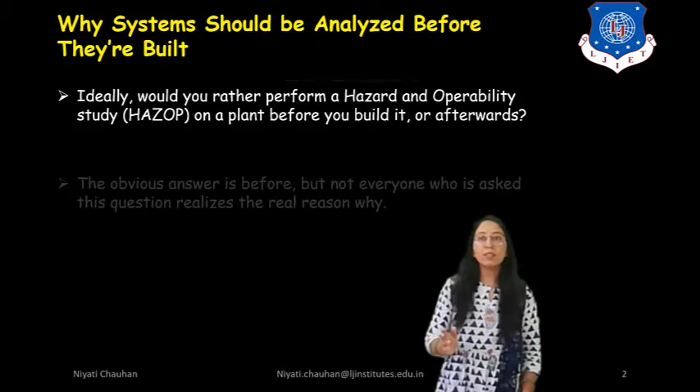Let's start today's session. In today's session, we will discuss why systems should be analyzed before they are built. Ideally, would you rather perform a hazard and operability study on a plant before you build it or afterwards? So here we are discussing hazard and operability study, when we are performing and analyzing our system. The obvious answer is before, but not everyone who is asked this question realizes the real reason why these systems should be analyzed before they are built.

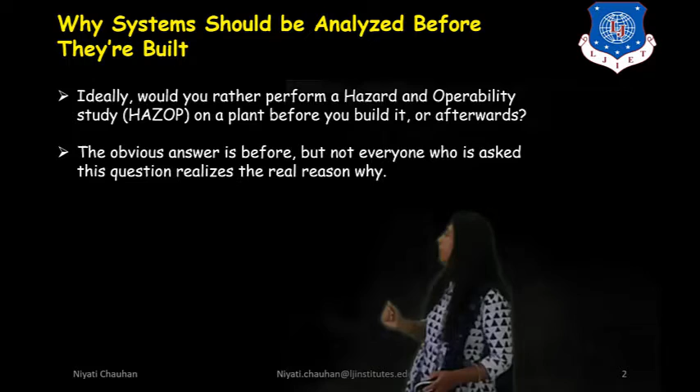It's cheaper to redesign the plant on paper. The alternative would be to rebuild the plant after the fact. The same applies to studying safety systems.

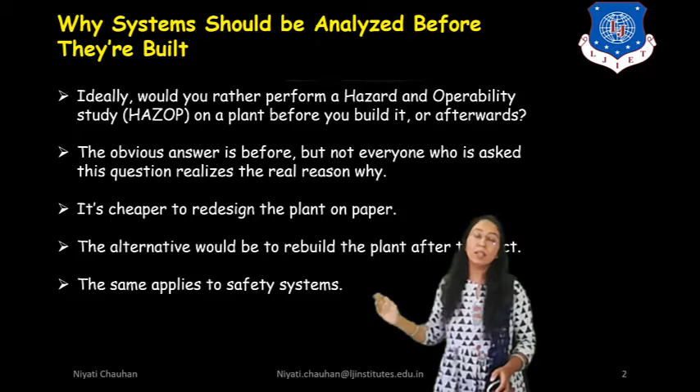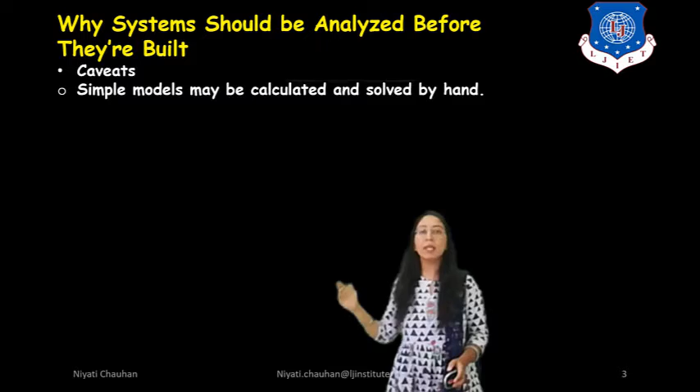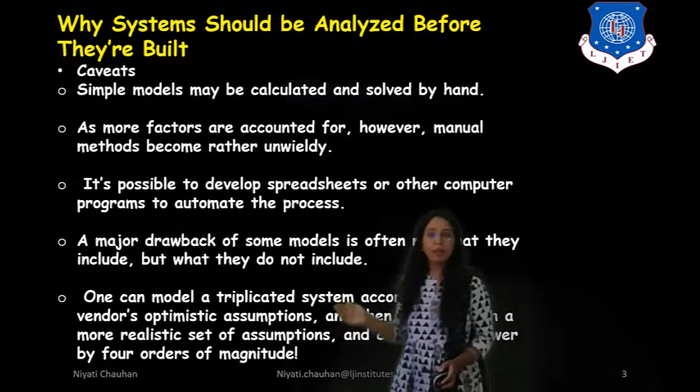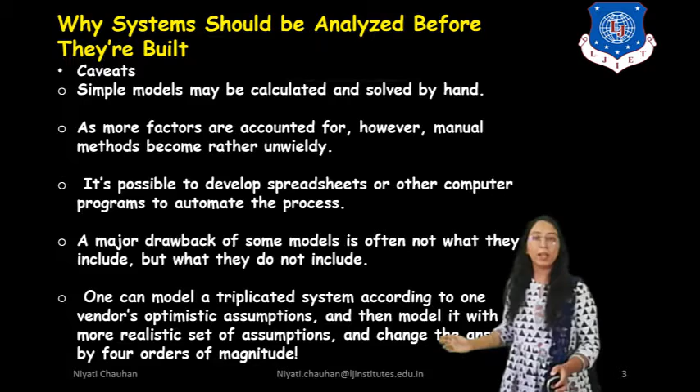Next is caveats. Simple models may be calculated and solved by hand. As more factors are accounted for, however, manual methods become rather unwieldy. It's possible to develop spreadsheets or other computer programs to automate the process. A major drawback of some models is often not what they include, but what they do not include. One can model a triplicated system according to one vendor's optimistic assumptions, and then model it with more realistic assumptions, changing the answer by four orders of magnitude.

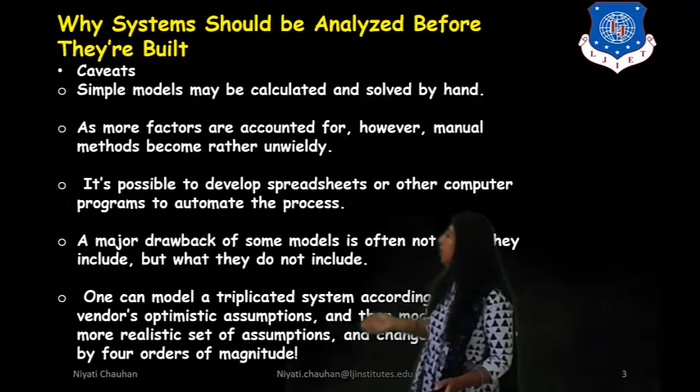So here we are discussing why systems should be analyzed before they are built. These are some of the reasons we have discussed in this session.

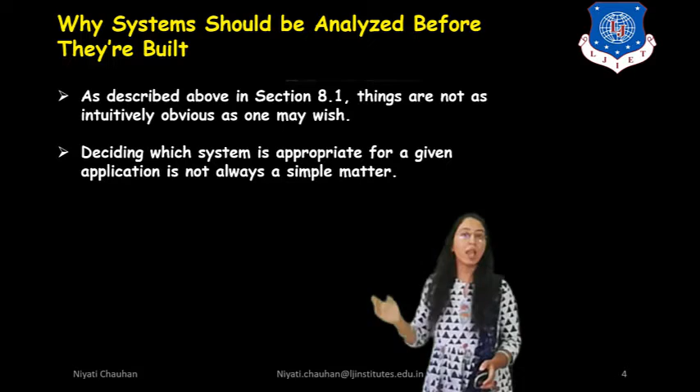As described above in section 8.1, things are not as intuitively obvious as one may wish. In the last lecture we discussed how things are not always easy to perform well. Deciding which system is appropriate for an application is not always a simple matter.

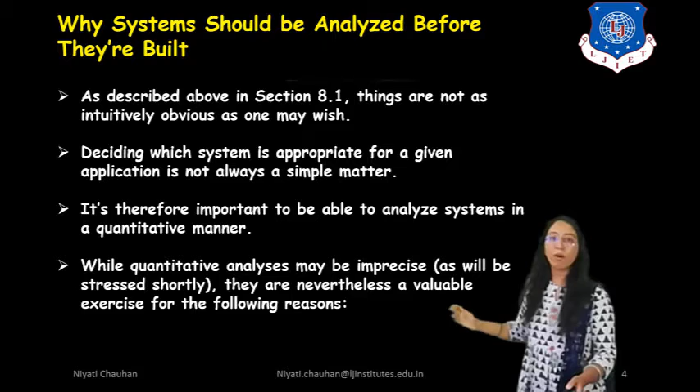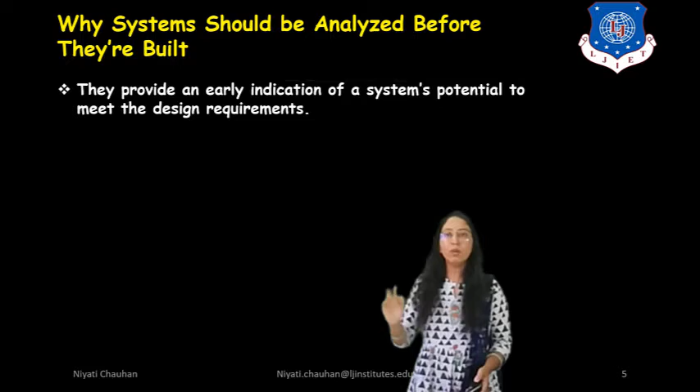It is therefore important to be able to analyze a system in a quantitative manner. While quantitative analysis may be imprecise, as will be stressed shortly, it is nevertheless a valuable exercise for the following reasons. First, they provide an early indication of a system's potential to meet the design requirements.

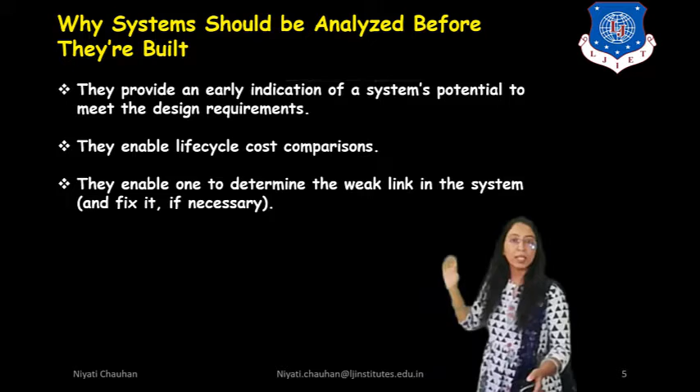Second, they enable life cycle cost comparisons. They enable one to determine the weak link in the system and fix it if necessary. They allow an apples-to-apples comparison between different offerings.

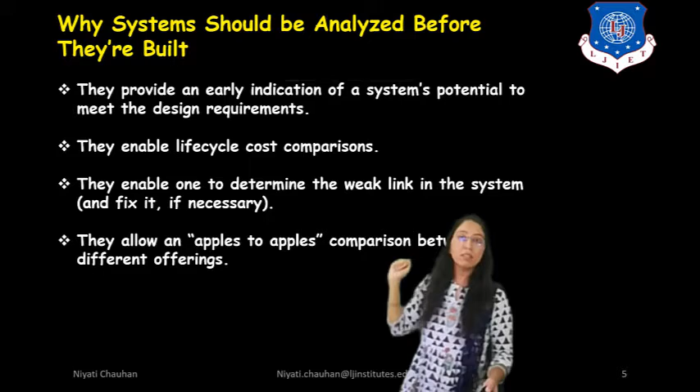So to summarize the reasons: first, for early indication; second, to enable life cycle cost comparison; third, to determine the weak link in the system; and fourth, for comparison between offerings.

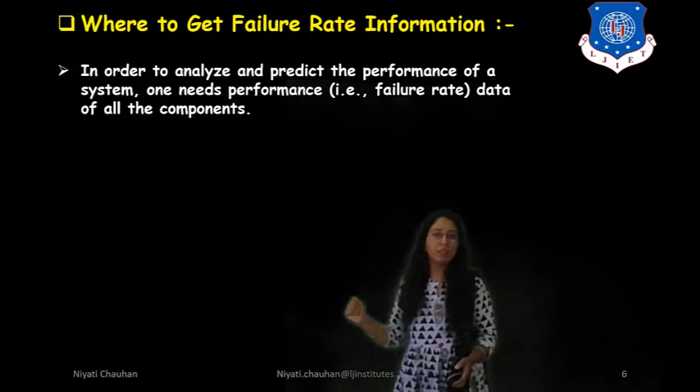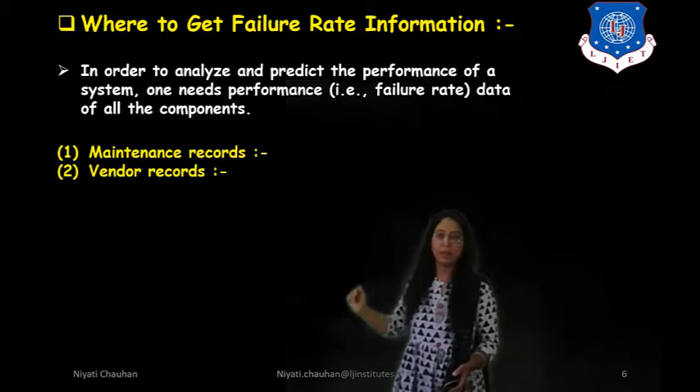Next is where to get failure rate information. In order to analyze and predict the performance of a system, one needs performance data, that is failure rate data, of all the components: first, maintenance records; second, vendor records; third, party databases; and military style calculation.

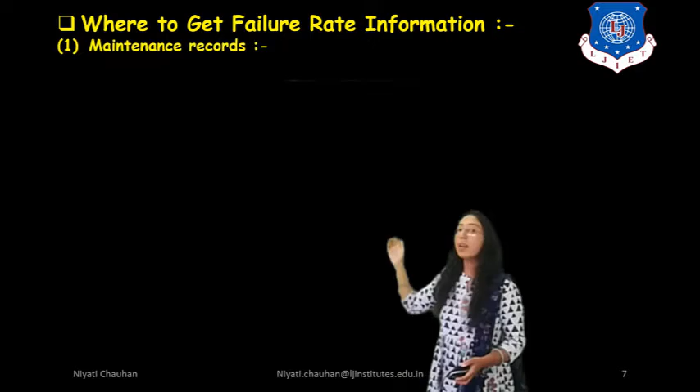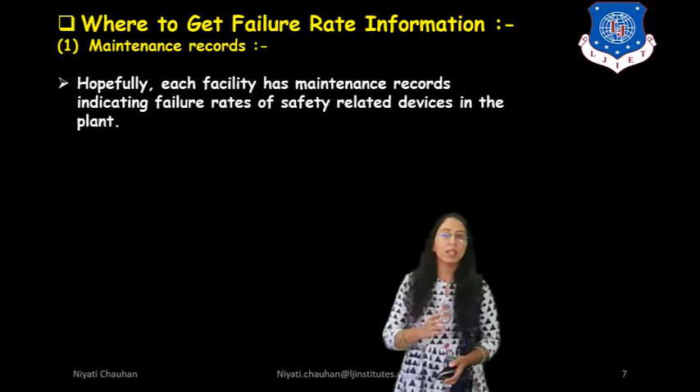First, discuss maintenance records. Hopefully, each facility has maintenance records indicating failure rate of safety related devices in the plant. The process safety management regulation, the standard studied in chapter 1, is 29 CFR 1910.119, appendix C, part 9, which states that users should be keeping this sort of data.

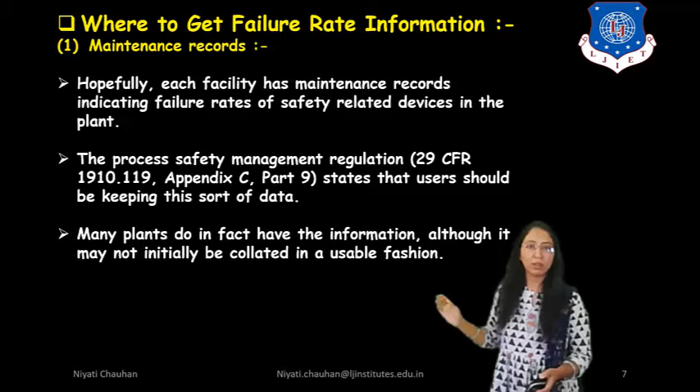Many plants do in fact have this information, although it may not initially be in a usable format. Plant maintenance records are the best potential source of data. They are most representative of the application, environment, maintenance practice, and vendor of concern. Obtaining statistically significant sample sizes, although important, can be difficult.

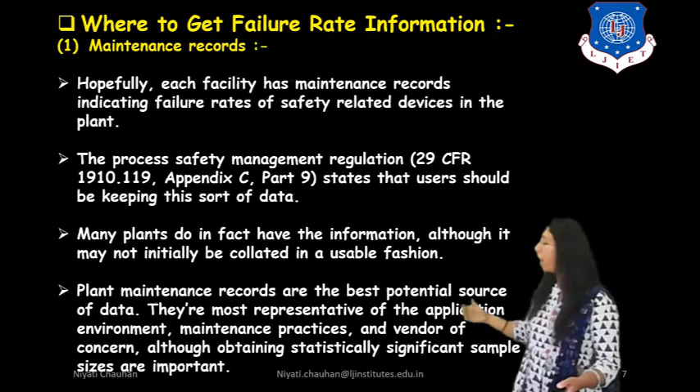Next, vendor records. One could ask vendors, but feedback from those who have tried is not very encouraging. Note that the 1996 version of ANSI ISA 84.01 stated that logic solver suppliers were supposed to provide such data. Vendor failure rate data, especially for field devices, generally does not take into consideration process or environmental factors. A device will most likely fail sooner in a dirty, corrosive service than in a clean service.

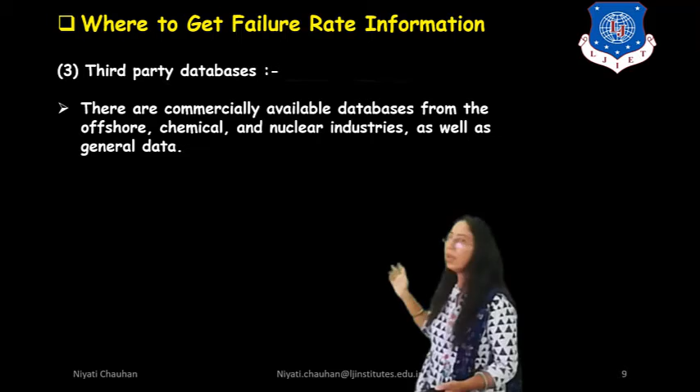So that's vendor records. Next, third party databases. There are commercially available databases from the offshore, chemical and nuclear industries, as well as general data. This information has been compiled and made available for everyone's use in the form of books and electronic databases. These databases are readily available, although not always cheap. They represent the second best potential source of data.

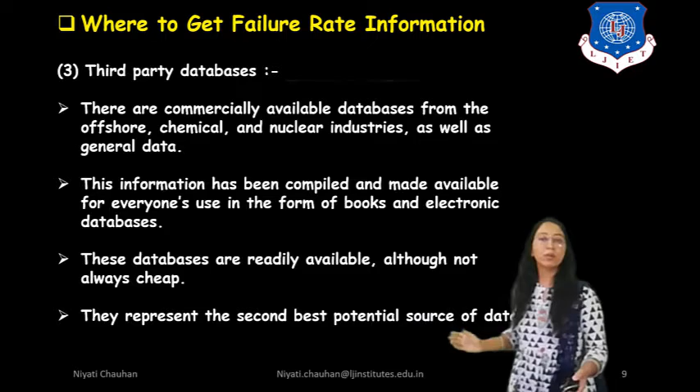Fourth, military style calculation. The military was faced with this problem decades ago. When a nuclear submarine receives the launch code, one wants to know the likelihood of the communication system working properly using some measure other than high. So that's the problem faced in military calculation.

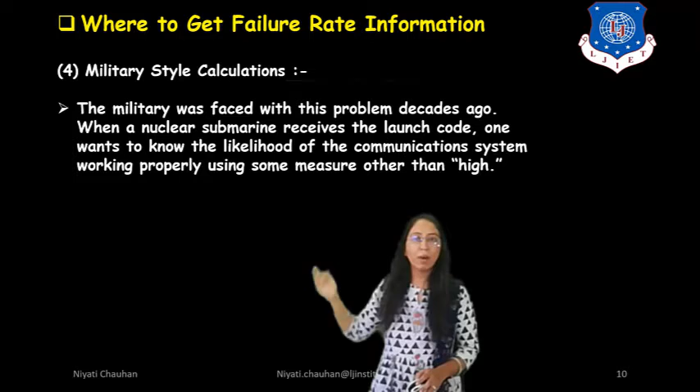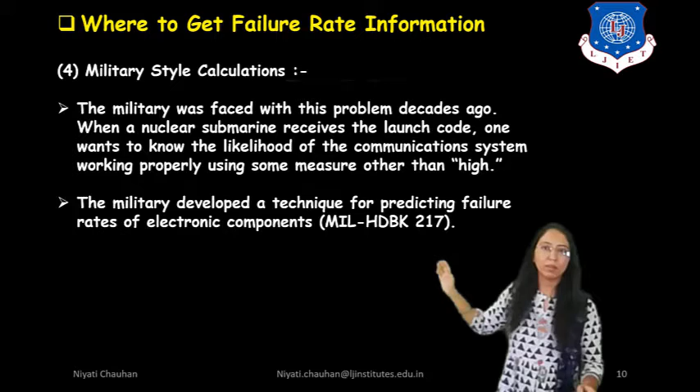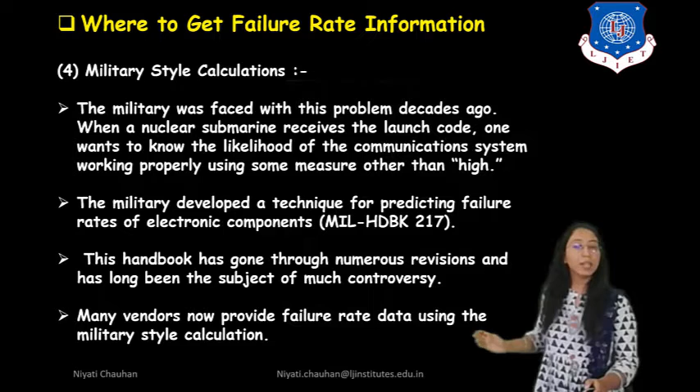The military developed a technique for predicting failure rate of electronic components, giving it the name MIL-HDBK-217. This question can also be asked in MCQ for 1 mark. The handbook has gone through numerous revisions and has long been the subject of much controversy. Many vendors now provide failure rate data using the military style calculation. So that's how we get data from military sources.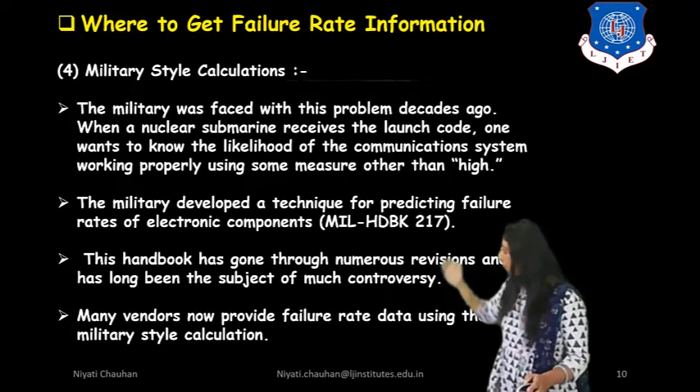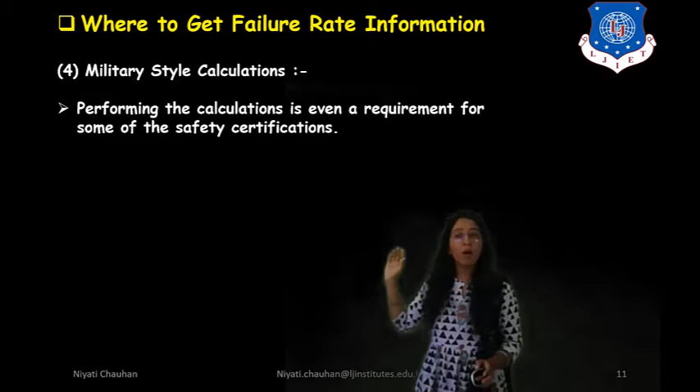Performing the calculation is even required for some safety certifications. However, the calculations may not account for all factors or failures that users may experience in the real world.

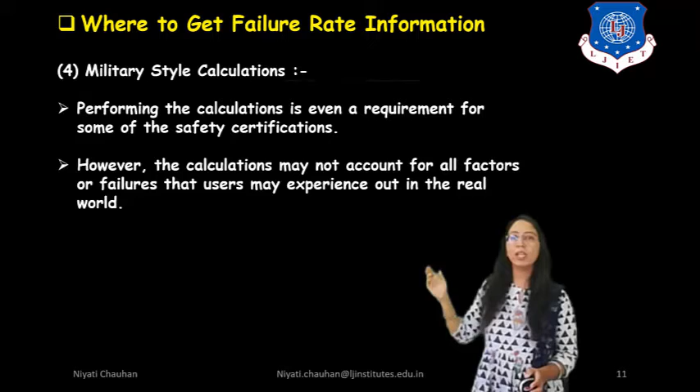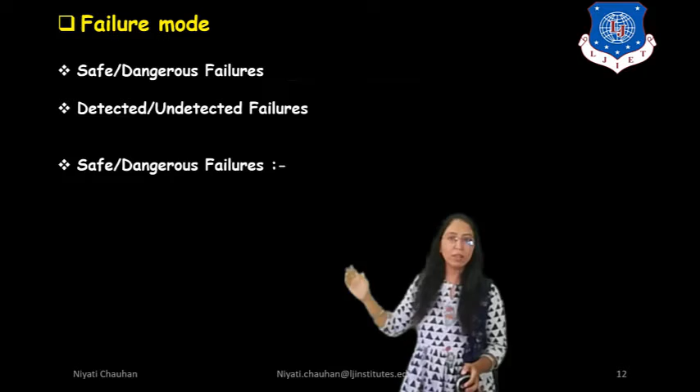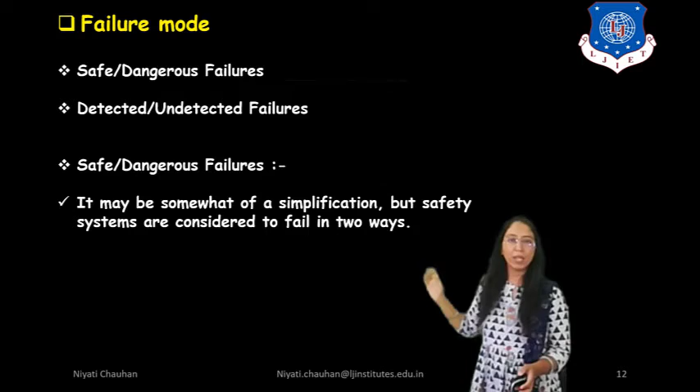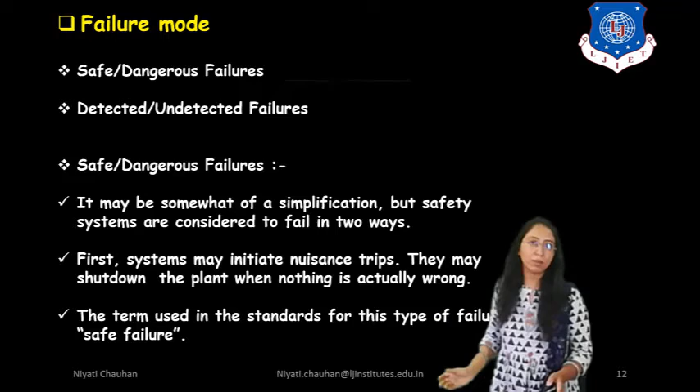Next is failure mode: safe and dangerous failure, then detected or undetected failure. It may be somewhat of a simplification, but safety systems are considered to fail in two ways. First, a system may initiate a nuisance trip, shutting down the plant when nothing is actually wrong. The term used in the standard for this type of failure is safe failure. When systems suffer such failures, people tend to lose confidence in them, and the system may be bypassed as a result.